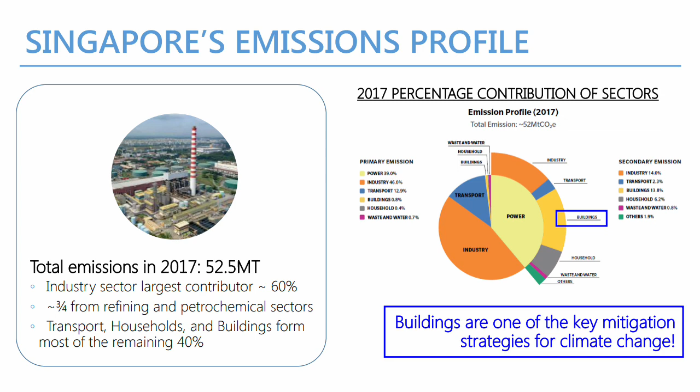In 2009, the second Green Building Master Plan, and in 2012, existing buildings were legislated for environmental sustainability. In 2014, the third Building Master Plan, and in 2018, the SLE, Super Low Energy Building Program, was launched, bringing us towards Green Mark 2021. So the Singapore Green Building Master Plan is important to meet our climate change commitments.

So what have we achieved to date? More than 40% of Singapore's building GFA is green. The Green Mark scheme has been used as a reference or standard in more than 16 countries, for more than 300 overseas projects, and 87% of them involve Singapore-based firms. So there is business to be done as well. And the average EUI for buildings has improved by 11% since 2008. So the question is, how can we do better?

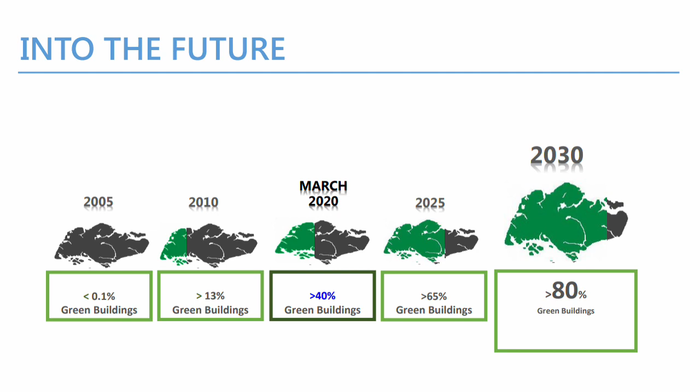In terms of the carbon footprint of the building, a sizable part of it comes from the energy usage of the building itself. So a super low energy building, in short we call it SLEB. This is a term that you will be seeing quite frequently in the future. This is very important. So it's also important to understand what makes a super low energy building.

That's the first point. And how do we make technological know-how available in order to encourage innovation? And are there opportunities other than climate change mitigation? Those are the important questions.

So what are the components of SLEBs? On the left, you see the typical building energy consumption profile. 60% goes to ACMV, 15% to lighting, lifts and escalators 10%, ventilation 10%, others the remaining 5%. So you can see how aircon and lighting take up a considerable 3/4 of the energy consumption. So what are the SLEB features that address this energy consumption profile?

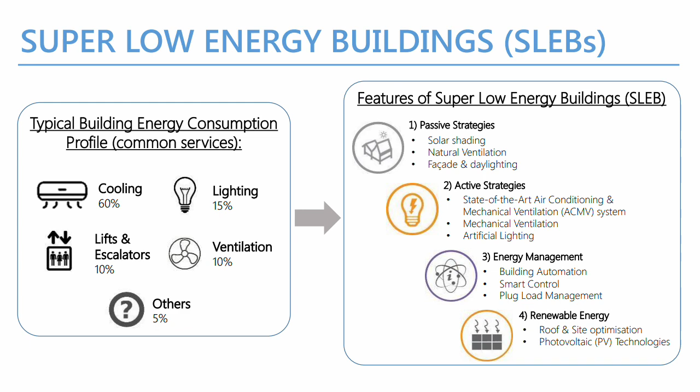So what are the energy savings over a building life cycle for SLEBs? The basis is 2005 as a baseline, right? Because we always need a point of comparison. So for SLEB, it performs at 60% over the 2005 baseline. Okay, so for green building, there's always a cost premium at the start. You're paying more at the start. So this is a very typical calculation. How much energy are you going to save per year? Right, and if you calculate these savings versus the cost premium, how many years does it take to break even? Okay, then after that, you're going to start to reap the benefits. Yeah, so that's how the calculation is usually carried out.

So you can see for the capital investment put into SLEBs, the maximum payback is projected to be, I think, close to 6 years. Right, and the earliest is around 2 years. Right, thereafter you can have your net savings per GFA.

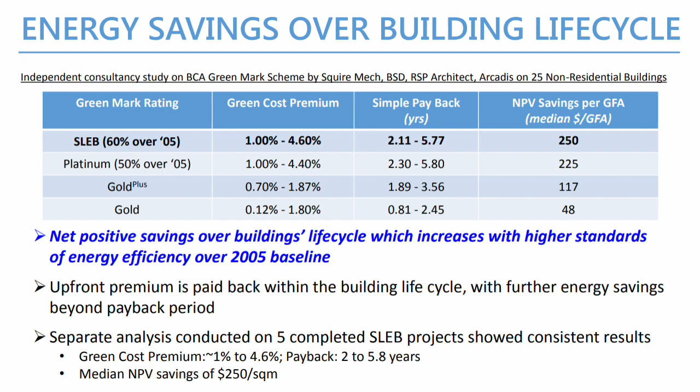The learning objective for this session, firstly, you should be able to describe the Green Mark scheme in your own words. Why is it necessary? What is it composed of? What are these modules? And what does each module actually do? LO2, use these 6 modules as a framework to analyze a building. Okay, so you use this session to understand the framework, which will make your subsequent site visit more meaningful because you have a certain lens with which to analyze a building. You get to see the pros and cons, the success and failures of a building.

LO3 is reframe existing assumptions and matrix system. Okay, so this one is a bit higher level, right, which involves a bit of critical thinking on your part.

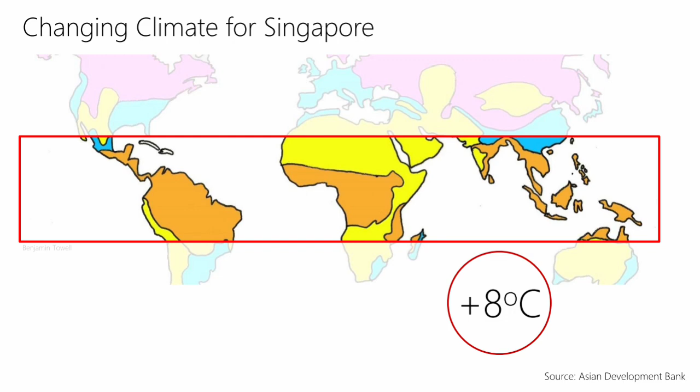So in Singapore, we have the Green Master Plan, SG Green Plan, which the entire country is very supportive of, and we've moved and progressed as a country together, right, for the past couple of years.

And some key areas of focus: city and nature, green government, energy reset, sustainable living, green economy, and resilient future. Right, I think these points should not be alien to you because you see it almost on a daily basis in the newspapers, in the news, or even around the initiatives you see in your neighborhood, right?

And Green Mark 2021 is a key driver that pushes beyond greening for our buildings to bring us closer to nature, to blend with nature, and to see how the built environment and nature can be integrated, right? So it goes beyond that, meaning we don't stop at just introducing a lot of vegetation and green walls and stuff. There's much more to be done.

Okay, so raising the sustainability standards of our building, we are aiming for 80% green GFA, 80% of new developments to be super low energy from 2030, and 80% energy efficiency from 2005. So this one is pretty dated already. I think we have been pretty successful in that area. And we're always pushing to improve ourselves, and more initiatives will be announced soon.

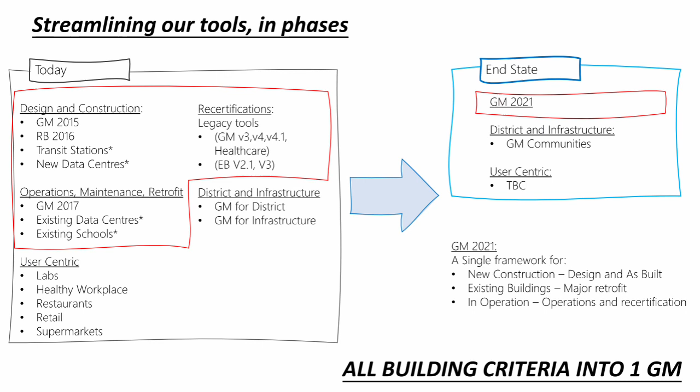Okay, alignment to global sustainability reporting systems, sustainable finance taxonomies, TCFDs, emphasis on UN SDGs, and green real estate reporting frameworks. So by the international definition, Green Mark will retain its focus aligned with the wider sustainability issues, with a strong emphasis on energy efficiency. So the WGBC Healthy Framework Principles have all been taken account of: protection of health, prioritization of comfort, harmony with nature, positive behavior, social value creation, action for climate change. All of these principles have been incorporated within Green Mark 2021.

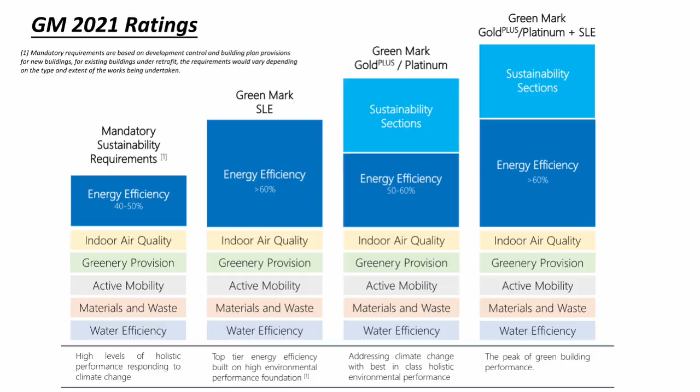Okay, so sustainability sections, there's flexibility built in. There are no prerequisites. You just need to achieve the number of points which demonstrate a good breadth and depth of sustainability measures being tackled of relevance to the project. Okay, so I think scoring, we will not go into it, right? You can leave it to when you go out and practice. And I think for now, we can just look at it in terms of principle and examples, right? If you are looking at how a building has achieved such a high Green Mark rating.

Okay, at a glance, it is a modular system which allows for easy update. Yeah, so each individual module itself can be continually improved. Right, so same goes for the code of practice. So how the industry works is that, for example, you have a system that we're rolling out, we always have a supporting code of practice, where all the information of how to comply with and how to use that particular vehicle is all spelled out. And so far, all the code of practice has been very clear.

And it's been very clear. A lot of work put inside. It has been improved throughout the years. In fact, if you're thinking of what are the principles of CFD design, if you're thinking about energy modeling, actually you can just download the code of practice and take a look.

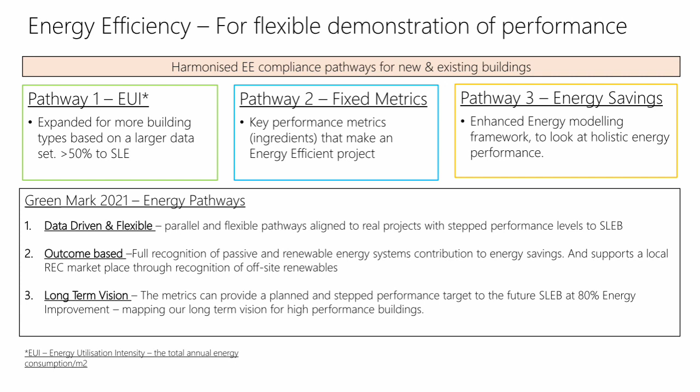Okay, so for the purpose today, you need not go into detail. Just be aware of the fact that it's harmonized and it's three separate pathways, and how the three separate pathways function. It's not necessary to go to this depth when you are analyzing your case study. You can stop at the principle level. But if there is some information that you have found in your research and you wish to share it, please go ahead as well.

Okay, so for example, in this chart, this is very typical. Like if you open a code of practice, it's kind of simplified in this kind of table form. So what is the building type? Commercial, educational, healthcare, others, industrial, residential. Which pathway are you going for? 1, 2, or 3, and what are the performance metrics that you have to fulfill?

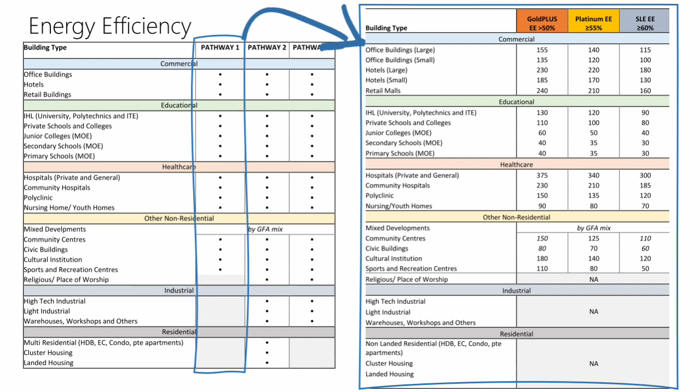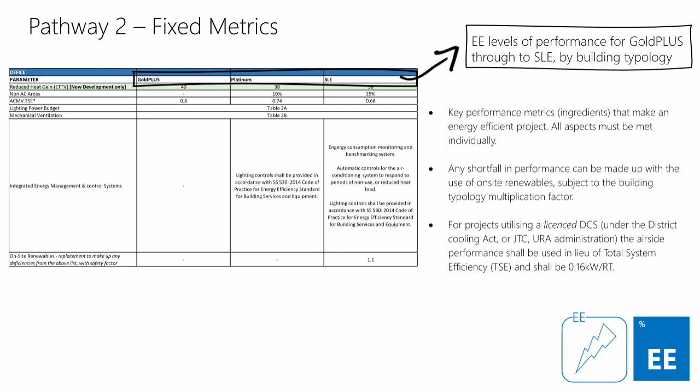So this is just to share how you use the code of practice. Okay, so for example, if you are designing a building and you have opted for pathway 2, then it will bring you to pathway 2. You are using fixed metrics. Okay, so you can see whether you're going for Gold Plus, Platinum, or SLE. What are the performance metrics that you have to fulfill?

This is just for sharing for your awareness. Once again, you need not go into this level of detail when you're doing case study. Focus more on the principle level and the design level. These are more fruitful because you guys are still students.

Okay, pathway 3, energy saving. So you have to make a point of comparison, like understand what is the current code level, what is the minimum level, and then you have to demonstrate that the way that you have designed the building, all the fitments are going to take how much energy saving as compared to the baseline of the current code.

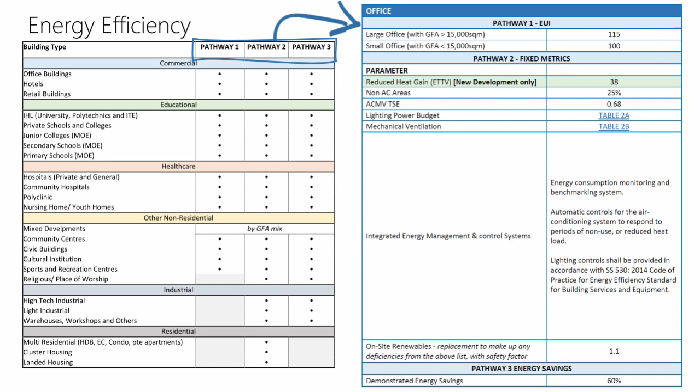Okay, super low energy buildings. Once again, for energy efficiency, 3 separate pathways. Pathway 1 is using EUI. And for example, for residential projects, if you're opting for pathway 2 and you are designing, let's say, a high-rise condominium or apartment, you can open up and it will show you the requirements, like how you have to show that you have reduced the heat gain of 20 watts per meter square, and the unit layout 60% have effective ventilation. So effective ventilation, how do you measure it? That is the question we will address in subsequent lectures.

Okay, so for example, like aircon system, you have to show them that all of them are 5 ticks. Equipments are all 5 ticks. Ventilation, common corridors, 100% above ground corridors are all naturally ventilated. Lift, you're using regenerative drive, and the lighting power budget, with 60% savings, the prescribed performance. Show the light fitting, and how much energy saving it has, and whether the way that you have grouped and designed your light, are there additional savings demonstrated?

For example, one common thing is that throughout the daytime, maybe just 40% of the lights need to be on in the lift lobby. You need not have 100% because you have daylight. So it's only after like 7 p.m. that you have more lights coming on. Okay, so that is one way you can improve lighting power budget.

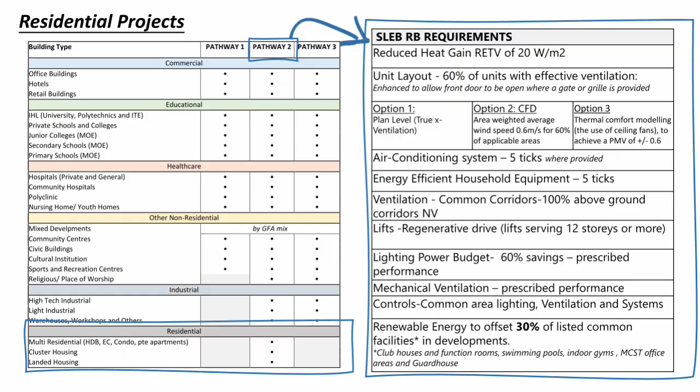Okay, so things like mechanical ventilation, controls for common area lighting, ventilation and systems, usage of renewable energy to offset X amount of percentage of listed common facilities in development. For example, clubhouses, function rooms, swimming pools, gyms. All these can use renewable energy. HW stands for health and well-being.

Okay, so these principles are actually good for you guys to reference. Take note of them and see whether you have addressed them in your design. So actually when you're doing your site visit, this is one of the important things that you can observe when you are in the space, because you are a physical body in the space. So that's the difference: physiological effects, psychological effects, sociological effects. These are things that you can only observe when you are in the space. Then you can observe through time.

That's why I think because of the social media age that we are in nowadays, we tend to experience a lot of architecture through laptops, our devices, and social media. But the thing about architecture is that there is a component, a very sizable component. The experience of good architecture can really be done only in person. So it's not about how nice a space or a building looks on IG. If you use Midjourney, you can generate a very nice interior, very nicely rendered, but it cannot beat the experience of being in a physical space, lah.

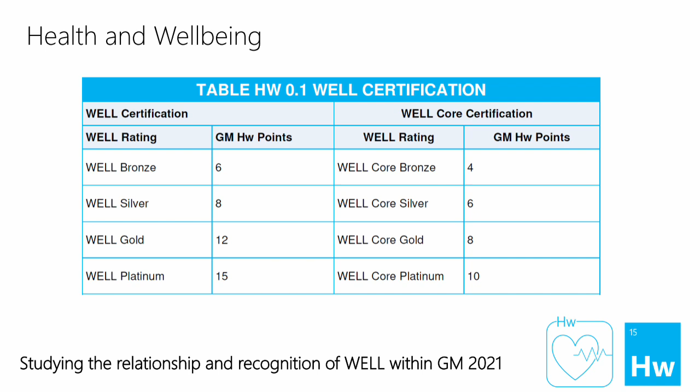Okay, so WELL certification: there is correlation to the health and wellness component of Green Mark 2021 as well. So it has some relationship and recognition of WELL, which is a healthcare kind of rating. So it's not in isolation just for the built environment; it has a certain relationship to something that's used to certify healthcare standards.

Okay, whole life carbon. Embodied energy, constructions, what methods you use, what products you use, what material you use, how you have conserved the existing structures, and how you fit out the space. Those are the categories.

So, for example, constructions: a lot of times we're building new buildings, but because Singapore has a shortage of land, a lot of projects will actually be additions and alterations to existing buildings. So do you tear down the entire building, or is there a chance to reuse some of the concrete structures? If you can reuse, that's a very good point.

Another example: if you have to tear down certain parts of the building, you demolish it. On site, you can actually crush the concrete into smaller pieces. You can't use that for the new building, but you can use it, for example, as the base for your driveway.

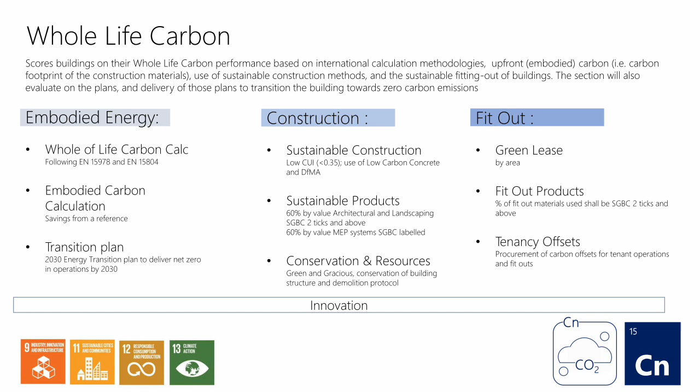So you need not waste the energy to crush it, then transfer it and dispose of it somewhere else where you have to find additional space. You can process it on the site itself and reuse it on the site itself. So this is one good way to conserve resources on a construction site. Just sharing for awareness.

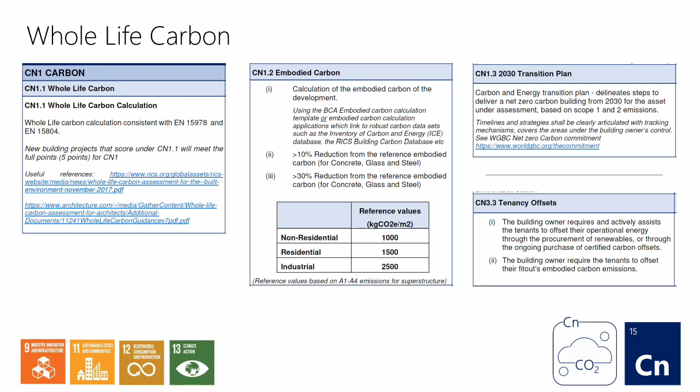So, embodied carbon, transition plans and tenancy offset. If you are retrofitting a space, what products you use, how they perform throughout, and how it's maintained, all have implications for the whole life carbon module.

Okay, I think this is the last module itself. RE for resilience. Under resilience you have the subcategories protection, management, and restoration. Once again, we are stopping at principle level and learning from the physical applications. So you can use these subcategories to organize your observations during your site visits.

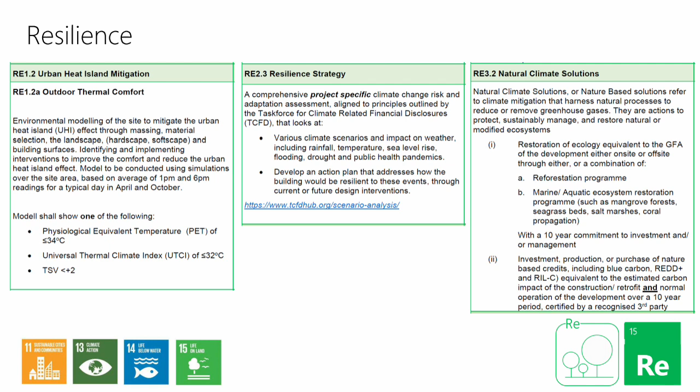Okay, some examples of the metrics to measure it. You need not go into this level of detail; this is just for your awareness. It's sufficient to stop at the slide before and give critical analysis to your own observations of the particular project.

Okay, for maintainability, we will not go into detail. Right, it's just because it takes I think quite a bit of industry knowledge to know how to design for it. I'm not sure whether DFMA will cover some of the principles. Probably it will, right? But for Green Mark, we are not going into detail. Okay, just be aware of the principle that is designed for maintainability. In short, we call it DFM.

Okay, and allows for smart facility management technologies to optimize energy performance. Just to know this level is good enough. Next is intelligence. Okay, so for intelligence, there is integrated subcategory, data-driven subcategory, responsiveness subcategory. Right, it has more to do with data, Internet of Things, sensors, and equipment. Okay, so architectural implications, there are some, but I think negligible at your stage. So just be aware of how these subcategories function.

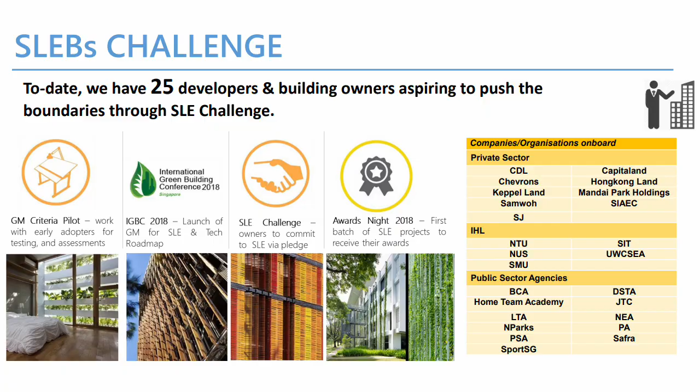And from SLEBs, you might be questioning like why do we have to go through all this, right? Doesn't it involve a lot of capital investment? So what's in it? What's the dollars and cents to it? So the green stimuli for economy, right, is sizable, right? And Singapore is the regional leader for green financing in ASEAN, with green buildings taking up 43% of the share, right?

And over the years, right, there has been growth in the size and number of green loans for building projects in Singapore. So you can see in year 2017, the total loan is 100 million. In 2019, it's actually 5.4 billion. Right? How many folds increase is that? Right? So green financing, it is something big. Sizable capital flowing in this thingy.

Right? Some publications that you can refer to, right, if you're interested. SIA has a green book, right? Talking about sustainability at the heart of practice. So architectural practice, what does it mean if you take sustainability into account, right? So quite clear, concise, written by architects, right? Well designed, right? So you can refer to that if you're interested.